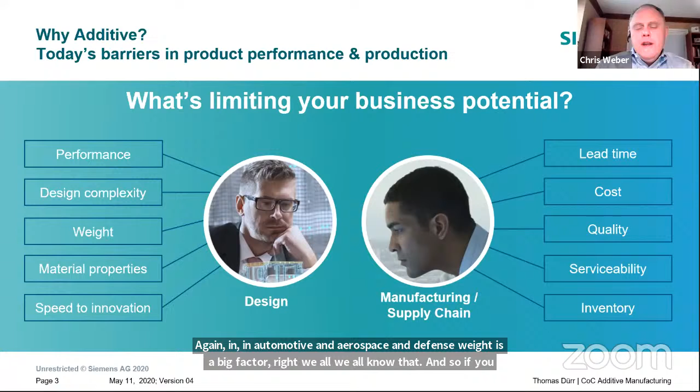Material properties is another one, right? Speed to innovation—we all pretty much are familiar with prototyping. Prototyping's been around for a long time. So to be able to iterate on a design faster is important. We have some consumer goods customers that do a lot of prototyping for clinics, right?

So think about if you're doing, I don't know, toasters or blenders or vacuum cleaners or whatever, right? If you can bring people in and have them try out the product—how does this button feel? How's the handle feel? Is it ergonomically correct? Should the handle be a little thicker? Should it have better grips?

Right? They can give the feedback, and then literally within 24 hours, depending on whatever you're printing and the material you're using—24, 48 hours—you could have a replacement part for that and bring those people back into a clinic and say, okay, we took your feedback into consideration, what do you think now? So just in prototyping itself, that allows you to do those iterations much faster, because let's say it was plastics, to make that change you'd have to create another mold. That takes time and that takes money. So speed of innovation is really important.

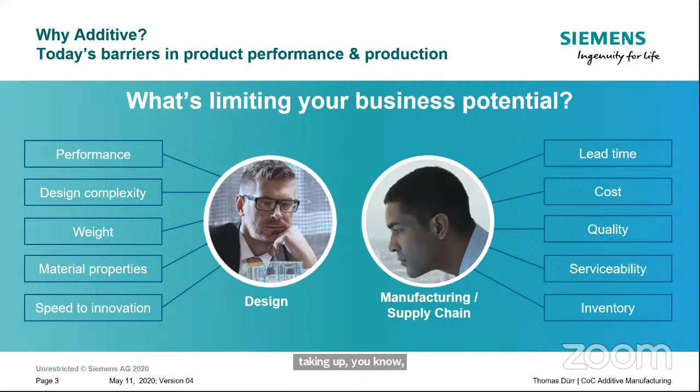It's the same thing when it comes to inventory spare parts in the shop floor. If you think about how many spare parts are in the spare parts stores in a manufacturing facility, and you multiply that by the holding cost, it can get into multiple millions. So what if you thought about your spare parts and asked which ones could I print on site? I'd have to really investigate how often do I replace that part, how much does the part wear, what's the mean time to failure? I might be able to say it'd be really good to have a printer on site for some plastic parts that I don't have to house because they've been sitting there collecting dust, or making it out of some type of composite. So inventory is another big area, and there's going to be growth in trying to reduce the amount of spare parts that you store in your manufacturing facilities. We all know that space costs money, so if we reduce the amount of space, that's money back in our pocket.

So the whole idea of additive hits a number of areas. One is reimagining parts, or your products - combining parts, maybe an assembly that was made up of 12 parts, and you redesign it into one part and make it more efficient. It really allows you to think out of the box, whether it's a part, tooling, fixtures, or molds - redesigning a mold, for instance, to be more efficient so it cools faster and I can get more parts out of the mold per hour. You can't limit yourself. Additive allows you to look at each piece of business, whether it's a small scale problem where I need a hammer for this nail, or an enterprise problem, like spare parts. How can additive help me alleviate or reduce the amount of costs that I have for spare parts? That falls into rethinking your business.

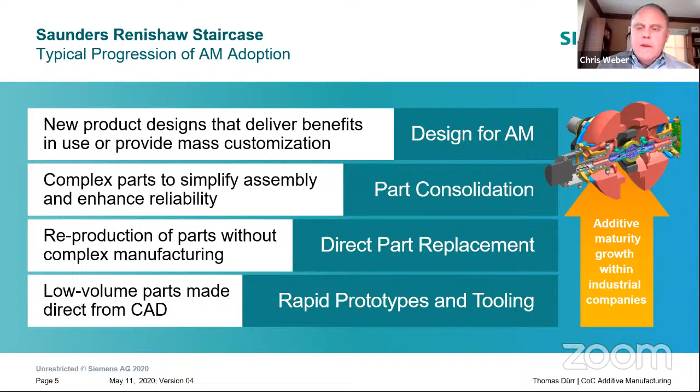That's important. Mobility, the high-speed trains - we're using that. I've got some examples here as success stories, but we're using it in the mobility services. Healthineers, our healthcare side of the house - things like cutting guides for surgeries. The software side of the house, where I'm from, is creating the software that enables the design and the validation and the printing and the feedback mechanism or loop in managing that whole process.

Motion controls, right? So we're working with the printer OEMs to outfit these printers with proper controls, because at the end of the day, if you're going to be serious about production, those printers have to be industrialized and they have to play nice on the factory floor. You can't afford as a company to have some architecture that's way out of whack from everything else.

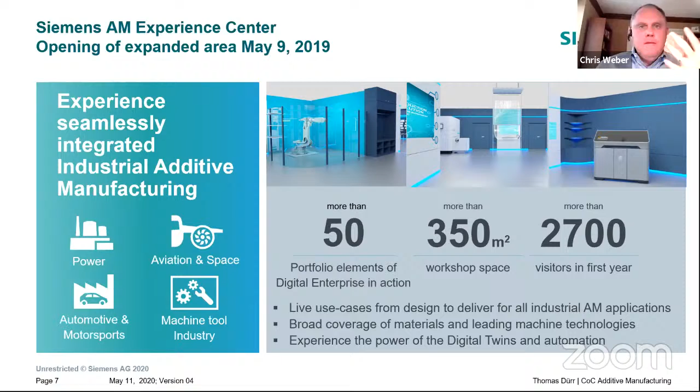And then we have a satellite center that we're opening up, hopefully, with all the COVID stuff, I'd say June, July-ish of next year, in our Charlotte, North Carolina facility. Similar type of thing, where we'll be able to bring customers in to get some hands-on, maybe some design clinics. If you're not certain about a specific printer modality or material, you can go in and get some hands-on. We're really excited about that.

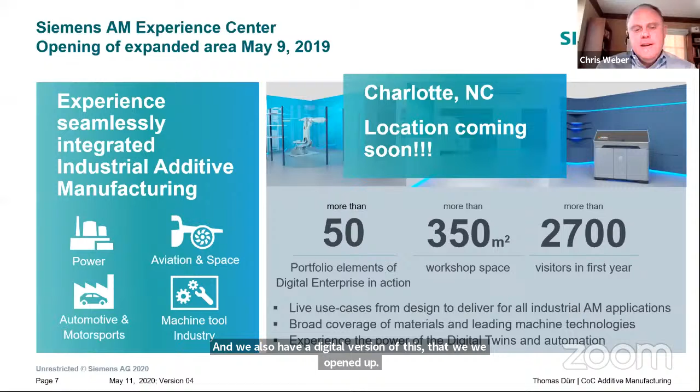We also have a digital version of this that we opened up in February, a lot of that was due to COVID. So we can go through a whole walkthrough in a virtual environment of the Erlangen facility, which is really cool. We've gotten a lot of feedback from customers that they really enjoy and appreciate that also.

And then I mentioned our service bureau business. We have roughly 40 EOS printers predominantly, I think maybe a couple of Renishaw in Worcester, and here in Orlando we started out with a couple EOS printers, and there may be a Renishaw on the way also. So we can print parts not only for ourselves, which is predominantly what we do, but we do spend, I think, 20% for outside of our business as well.

One of the things that's very unique, from the software side, we're well known for managing the entire process from ideation through the validation of the design, as well as the manufacturing planning and validation for that, and virtual commissioning, and then all the way out to the shop floor. One of the things we're focused on is that additive is special, but it isn't that special that you want to treat it like an island.

It has to play nice with the rest of traditional manufacturing. So it's not a panacea where you're going to junk everything you have on a traditional basis. Everything has its place, right? Because it'd be completely insane to say, well, I'm going to print hoods. No, that doesn't make any sense, right? So it has a place, and our big thing is that we have incorporated the additive.

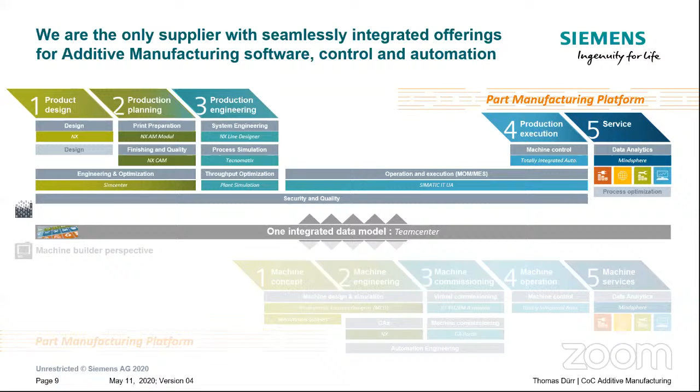Hey Chris, I think your Bluetooth went down. Hopefully everybody-- Chris, we can't hear you. Can you hear me now? Yeah, it's good. Okay, sorry, my Bluetooth went out.

So we've incorporated the whole approach for additive so that it has to be a part of traditional, or play with traditional manufacturing. That's important, so we want to treat it, handle it, enforce it in a way to play nice. You can't afford to have a new technology like this, especially if you're trying to productionize it, sitting off in its own little island.

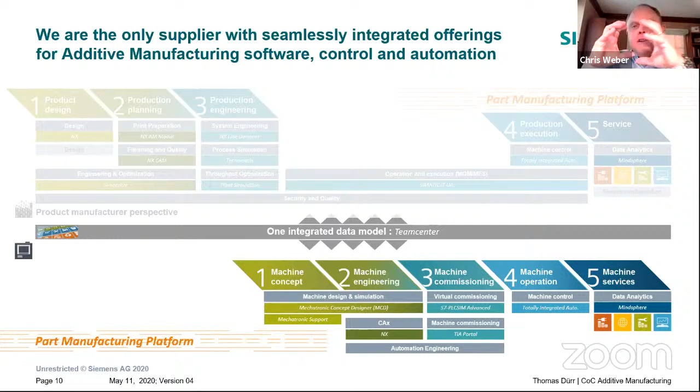The other thing that's different too is with our motion controls and factory automation side of the house, we're working in partnership with a lot of the printer OEMs. So we're outfitting some of those with our controls, which I'll cover in a little bit. There's some inherent value in utilizing, for those of you that may have Siemens controls, some Easter eggs available in utilizing our NX software, so that you can actually do a simulation and validation of the process and then capture that data. So we're not only looking at the process, but extending that back up into the printer OEMs.

When we look at the process, for those who haven't been in this space, it's a pretty chopped up process. We didn't put a lot of emphasis early on from a software focus. Full disclosure, back in the early days of prototyping.

What's being used out there is, sometimes people are using 3, 4, 5 different software packages. And if you're trying to get into the production side of the house, that becomes very limiting, and it opens you up to error. That's the last thing you want, because we always want to do first time right, especially if we're talking production.

So for us, taking the same approach that we do with traditional manufacturing, we bring that to the additive space. What we want is a continuous workflow, so if you chose to, you could have one person sitting at their computer going through the entire design, validation, print prep, and print process. One key factor is being able to manage that.

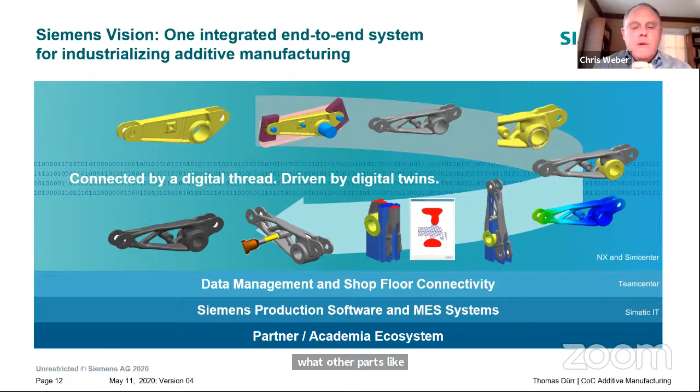So that's what we have here. This is basically a particular workflow for powder bed metals, and this is assuming that you're going to create a new part.

Depending on what printer modality you're going to be using, whether it's powder bed fusion for plastics or metals, or multi-axis DED, directed energy deposition, there's things you will do and won't do. This is kind of like a framework. Some instances you want to lightweight, some instances you might not. But that's pretty much the cadence: you're going to have to come up with a way to go through the design aspects of lightweighting.

The key thing is once you actually do a structural validation of the part, you don't want to have to go back from a mesh into a solid and back and forth doing translations. With the way we've architected the solution, you can continue through the whole process. So if there's an area where the walls need to be thickened up, you're not having to translate back into a solid. You can go all the way through, including post-processing if you need to, utilizing the mesh. That's our whole convergent modeling perspective, so you can do those iterations right then and there without going back and forth doing translations.

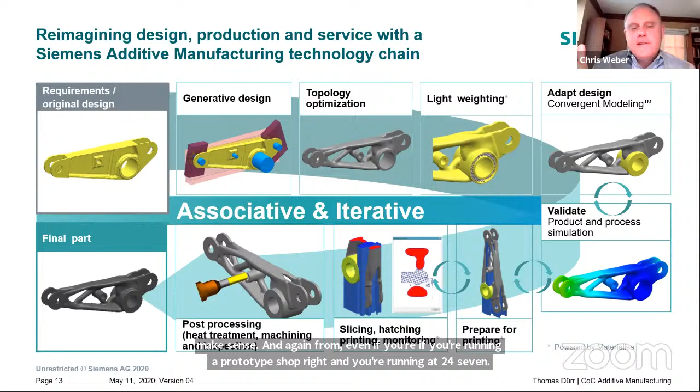Another view of the way we look at it, whether it's traditional or additive manufacturing, is that the digital twin is really important—being able to do everything in a virtual environment and have it representative of the physical. For additive, that's exactly where we're focused and continue to head: we always have a one-to-one relationship between the two, so you're shortening the overall design cycle, getting your products to market faster, and validating to make sure that when you print, it's right the first time.

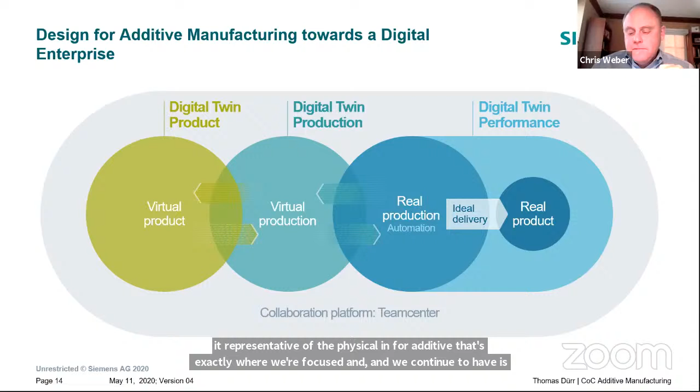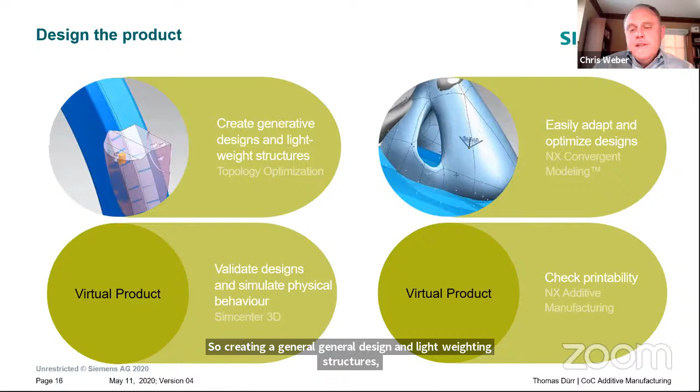So just a few vignettes here. We're talking about virtual product: creating a generative design and lightweighting structures, as well as adapting and optimizing the design as I mentioned. We're in the mesh here, and we're able to make changes to the part where we see fit, and then do the actual physical validation of the part using CAE analysis.

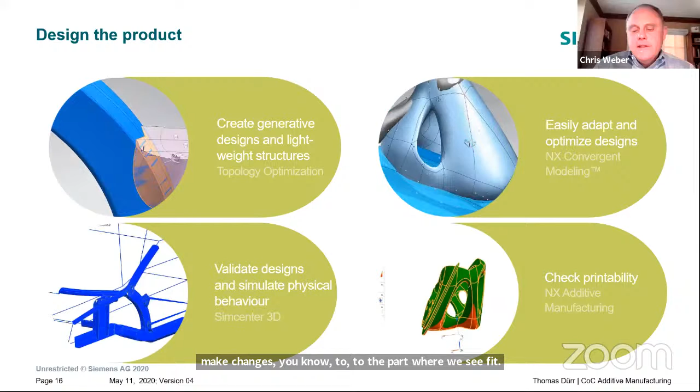Then taking that information and making those changes on the fly, and doing a print check—I want to be able to run a simulation on the print and validate to make sure I don't have any areas where I'm going to have a fissure, a crack, or deformation.

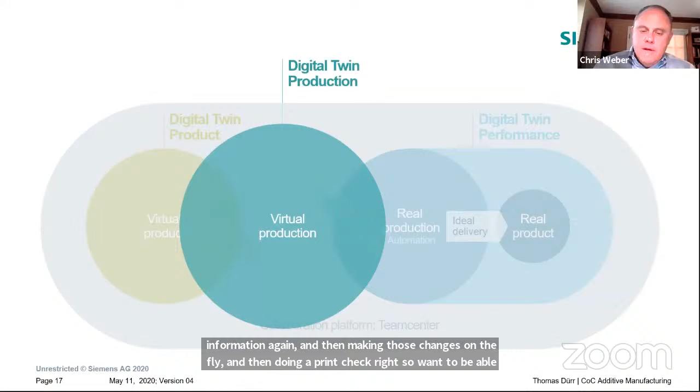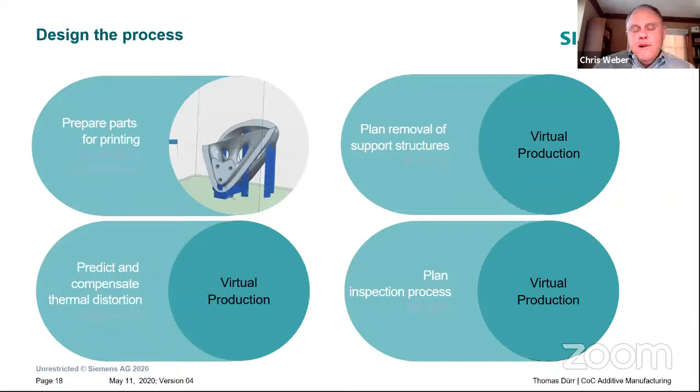As far as preparing, being able to have the build prep for the slicing and hatching, making sure you're able to identify the proper support structures. We can do that automatically or manually—a number of different ways to set up the support structures and position them properly. We even have, for the metals, the powdered metal side, a tool we call the easy button, which can take somebody who's a newbie and let them act as if they're experienced—it'll do the work for you, optimizing your orientation and support structures.

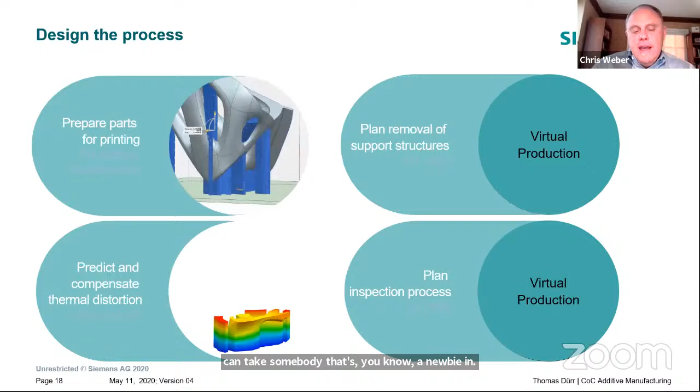Predicting and compensating for thermal distortion, again running the simulation once you've positioned it, to validate that I'm not going to have any problems. And then I may need to go back again and thicken up some areas or create support structures that will alleviate any areas of distortion.

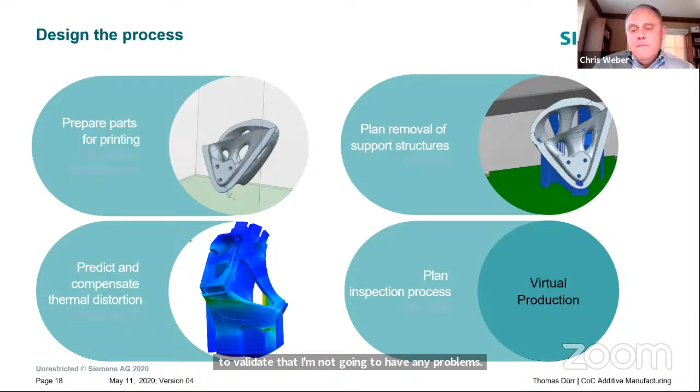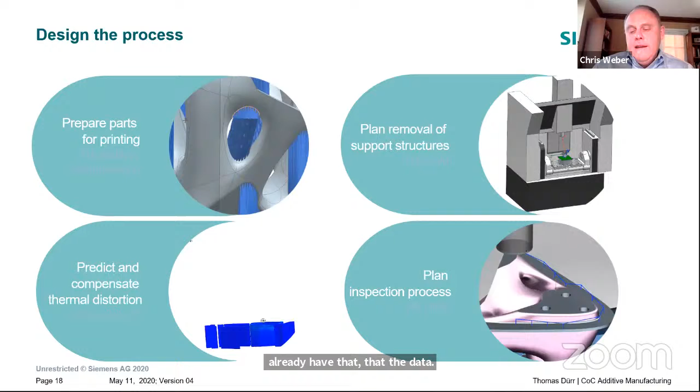Once I get to the point where I have to do any type of post-processing, specifically machining, I already have that data and can machine right off of it. I'm not having to jump into another package and run a separate simulation—I'm doing this all off of the same CAD model. And then also the virtual inspection, whether it's an in-process inspection or a standalone CMM inspection—again, you have all the data available, and it's all within the same product within NX.

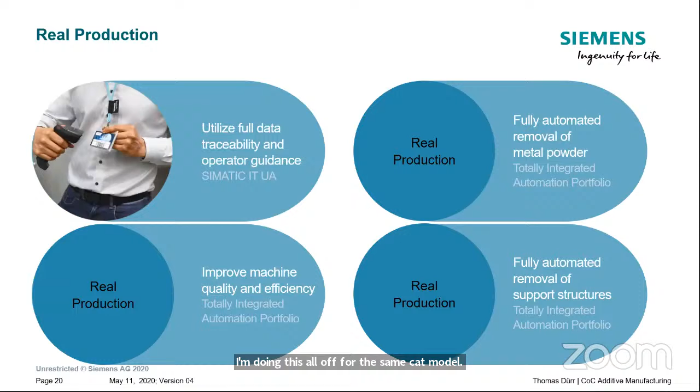And then the automation piece of this, the traceability. So in situ monitoring is really important, especially when it comes to validating your assumptions on your simulation models. What we assumed or theorized on what would happen to that model is in fact exactly what happened when we printed it.

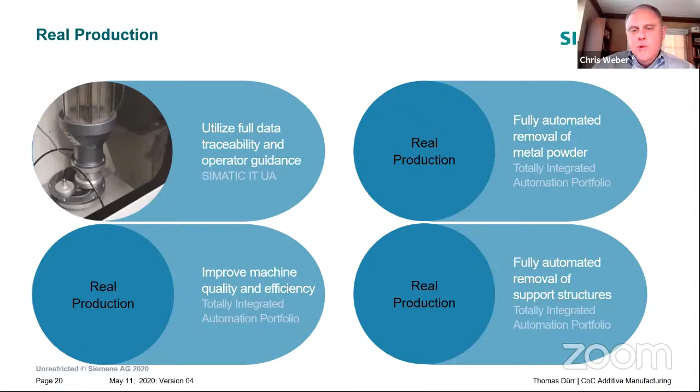So the closed loop piece of this, utilizing MES to be able to capture that data on the manufacturing process and feed it back into the overall development cycle of that part, is key.

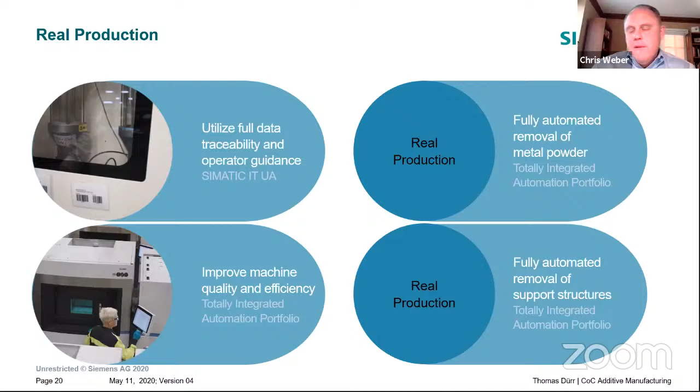And then also improving machine quality. We have our totally integrated automation portfolio, which is all focused on the shop floor and connectivity with those printers.

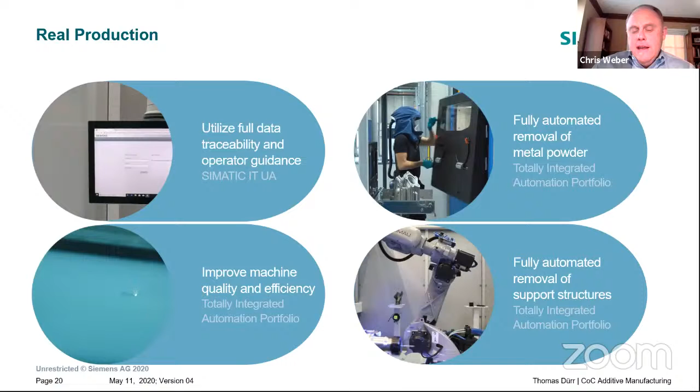And then the production piece of this, the powder removal, an automated way of removing the powder, and then support structures, again material handling, whether you're doing that in a hybrid environment and removing some of the excess material, or whether you do that via, let's say in this picture here, a robot and machine it off.

The other thing to take into consideration is if you're printing and designing in multiple locations, it can get pretty complex. So what we're trying to do is take away some of that complexity. What we've done is created what we call our additive manufacturing network.

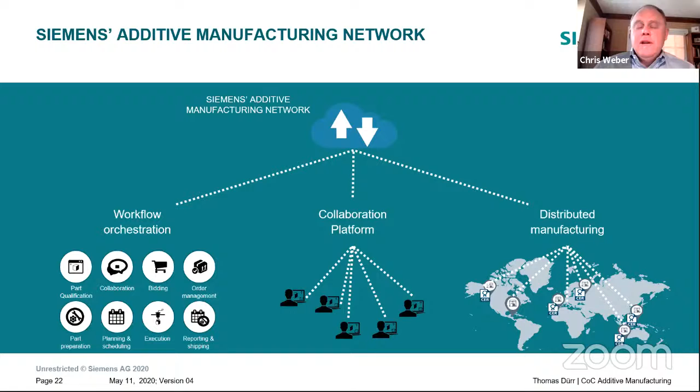That's a single source in order to do collaboration between an end user and supplier community, whether it's internal—your own internal service bureaus—or an external service bureau, or other associates across different locations. We want to be able to have an exchange, if you will, to facilitate that collaboration as well as the bid process.

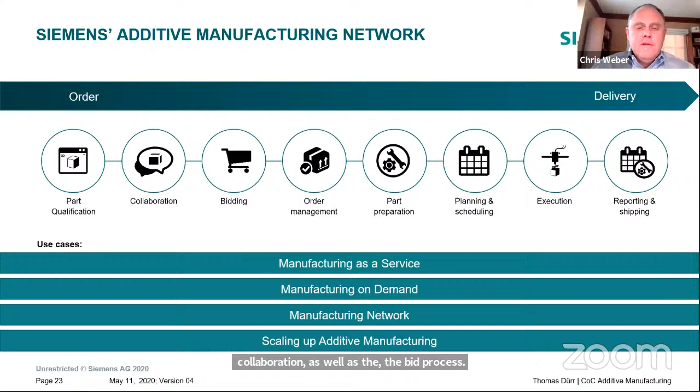So part qualification, collaboration, bidding, order management, part preparation, the planning and scheduling piece of this—which is really critical from a service bureau perspective—the execution, and then the reporting and the shipping. So those are all the things we're taking into consideration with our additive manufacturing network.

So what's trending? As I mentioned, there's a whole bunch of different technologies out there. Two years ago, powder bed metal was the real big ticket, everybody was focused in on that. There are some difficulties with powder bed metals, and some people have decided to move away from that and look at other technologies.

Binder jetting, or multi-axis, right? So multi-axis seems to be what I'm seeing—this is me speaking—in the last year, this is really starting to take off.

Laser metal deposition, whether it's through powder or wire, arc welding, electron beam. Cold spray's been around a long time, especially in aerospace and defense since the 60s, but that seems to be making a big comeback, or at least a lot more push on it, especially for coatings. So there's a lot happening in the cold spray side of the house, as well as material extrusion.

Whether that's gantry-based or robotic-based, that's another big area of growth. So multi-axis deposition—a lot of the OEMs are either, as I mentioned on the previous slide, doing DED, which is directed energy deposition, electron beam, fused deposition, carbon fiber. That's another big one.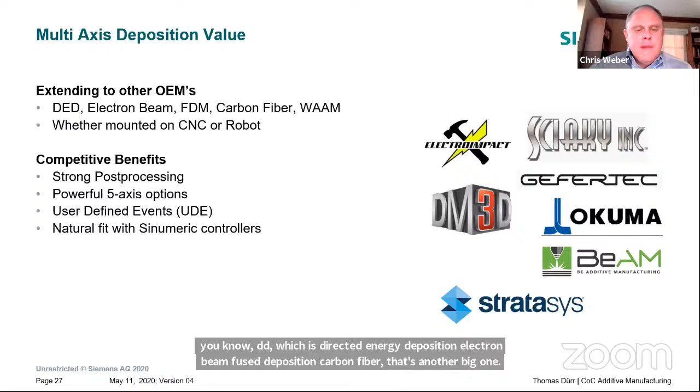The wire arc additive manufacturing—so think about a gantry in a warehouse where you could print a fuselage of an airplane, right? That's wire arc. And then whether the print head is mounted on a gantry, via CNC or robot.

And so the benefits to that: strong post-processing capabilities, 5-axis capabilities is really important, and the user-defined events, as well as it's a natural fit for us—being selfish again—for our Sinumeric controls devices.

So the CNC machines—there's hybrid, such as the DMG Mori, for instance, where you're doing additive and subtractive in the same space.

And then, or if you're looking at just additive by itself, some of the competitive benefits are high accuracy and rigidity, mixed manufacturing needs based on part requirements at any time, reduced fixturing, and machine kinematics are well defined. So this is one of the areas we're spending a lot of time and energy in.

We do have a huge expertise in this area to begin with, and then just adding additive to it is just like adding another option for us.

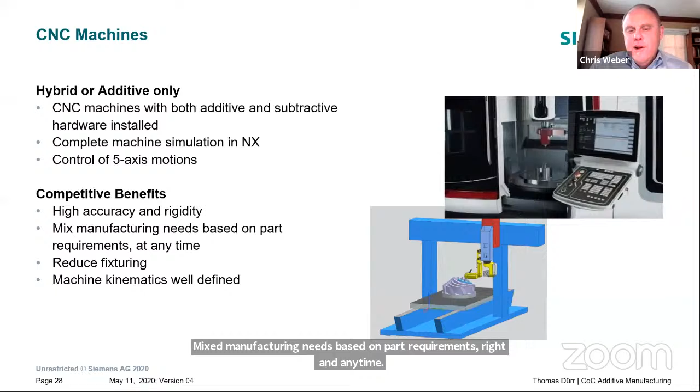As well as robotics, that's another area. There are some OEMs out there that provide out-of-the-box functionality for multi-axis robot based systems, as well as we have customers coming to us saying they know robots, they know welding, and want to make their own work cell. So we're helping some of those customers with designing those work cells. This is a real interesting area, and I think there's going to be a lot of growth here, so it's one to really keep your eyes on.

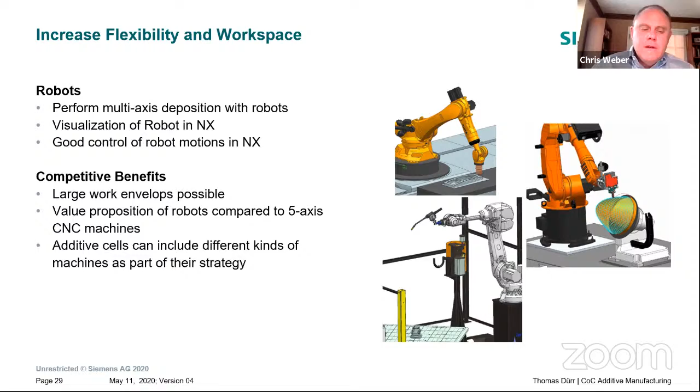I've mentioned the workflow earlier. As you can tell, that's basically the fixed plane or flatbed additive, as some people call it. That process is going to be different from multi-axis. For multi-axis, you're going to decompose the part, load the machine kinematics, and locate the part, whereas before you'd be doing nesting, you're not going to do nesting in this scenario. For the fixed plane, you're creating support structures; here, you're creating tool paths. Whereas before you'd be slicing the data and doing post-processing, here you simulate and post-process the actual tool path. The 3D print program is different too, because here you actually run G-code to facilitate the print process. So there are some similarities with the process, but definitely some differences in how you execute each component.

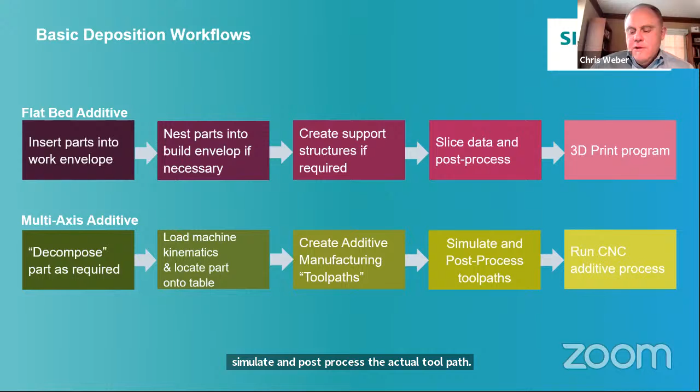So let's talk about some success stories.

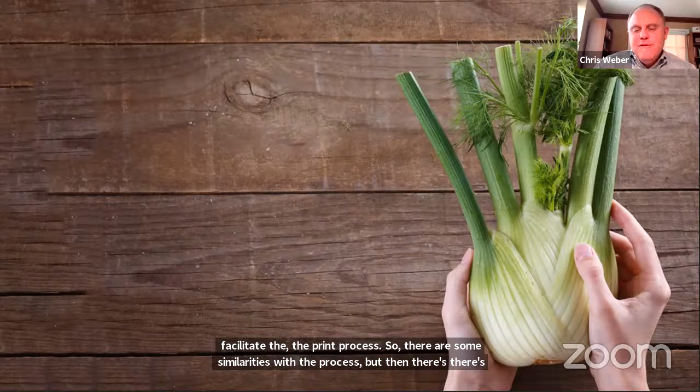The fennel bulb is one of our first ventures, and there's a kind of cool story to this. One of our engineers in corporate technologies was the first person assigned to redesign a burner assembly that we use for our customers in a refinery. This gentleman couldn't really think outside the box, so he went to the grocery store and happened to come across this fennel bulb, and the light bulb went on. That fennel bulb became the inspiration for the redesign of this burner assembly.

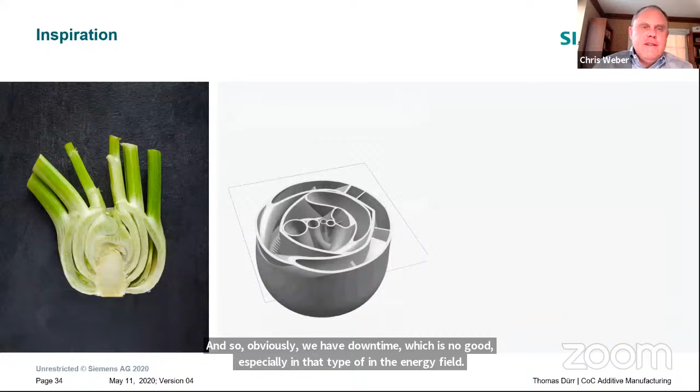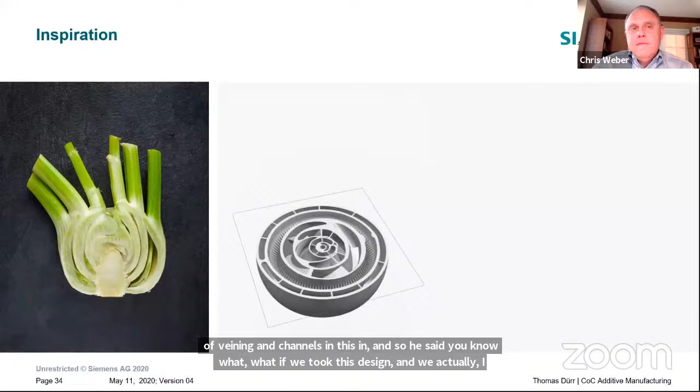So here's where the fennel bulb comes in. He noticed there was all sorts of veining and channels in it, and thought, what if we took this design and brought it to the burner? Now, obviously, from a traditional or conventional manufacturing standpoint, there's no way, as you can see in this animation, that you'd be able to do this traditionally. Just not possible. So that was the inspiration.

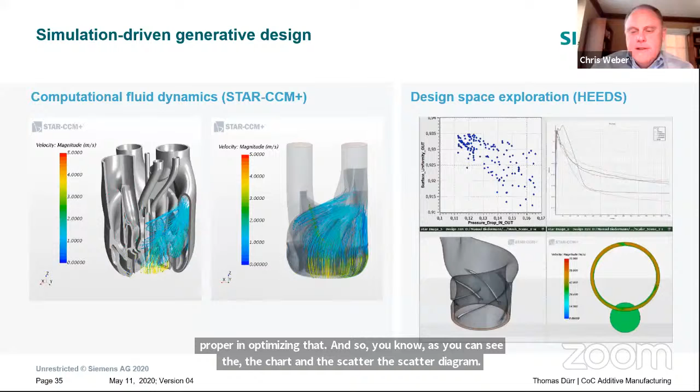What he utilized is our CAE software, a tool called HEEDS, where you set the parameters for the particular part and it will actually create the design for you. It'll optimize the design, going through and checking that, in this case, the heat exchange is proper, optimizing that. As you can see in the chart and scatter diagram, it's automatically designing and running through different iterations of the part, and you can tell it how many iterations you want. You don't want to let it run for 3 weeks, but you could if you really wanted to optimize something. But that's what was used to optimize this part.

So now we were able to bring this part down from 3.5 meters to 1.5 meters. We've reduced the entire size of this thing, and it's now one part. What's the other cool thing about this, I'll go right here to the video.

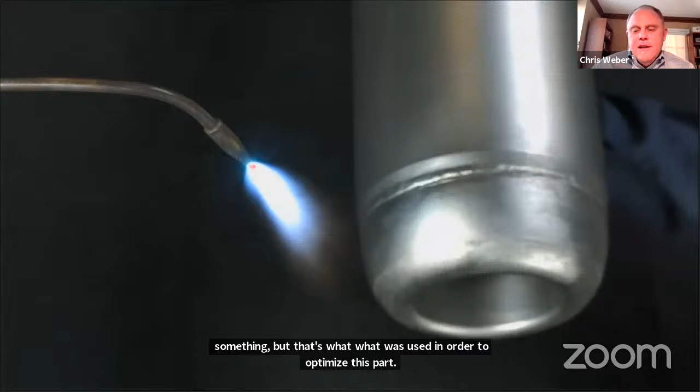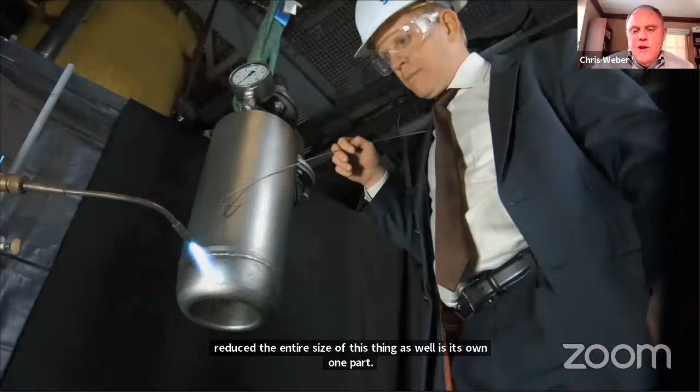This actually disperses the heat better than anything they would have been able to design before. This is the gentleman who was the engineer that redesigned the burner. As you can see, he's heating up the ring to prove a point, and you can see it getting glowing red. He's going to pull this away and put his hand on it just to prove how efficient this new design is at removing heat.

So what's that done for us, for the customer in that area? This is no longer a maintenance issue. That tip does not melt off anymore because it's dispersing the heat properly. So that was a big bonus for us, and it also helped us win an additional contract.

So these are the type of things you need to look at. When I mentioned before about cost and economics, you've got to look at the whole big picture. This was a little more expensive to make initially, but in the long term it's paying dividends like nobody's business.

Another thing we did internally is with our turbines. The maintenance contracts are where companies like Siemens and GE make their money. When it comes to energy, the less your turbine is down, the more money you make. So this particular part, this burner, we call the Buma burner.

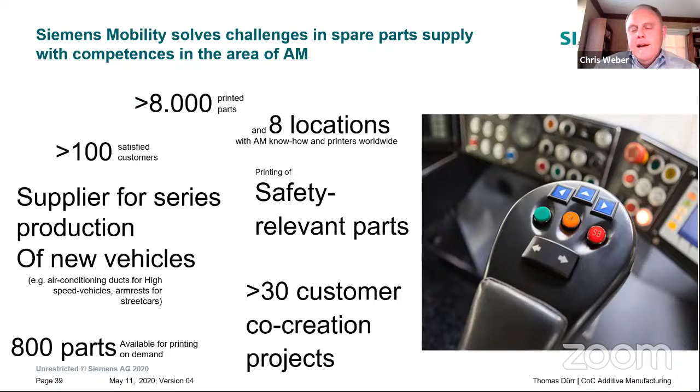So to get the money back out of, or the payback from, a mold, this is actually a lot more cost effective. Plus it's easy to make spare parts when we need them—we don't need to keep spare parts sitting on hand. So now if something breaks that we've printed, we just print another one.

Let me shift gears a little bit away from Siemens and talk about some of our customers. Toolcraft was one of the first folks to jump on board. Toolcraft builds a lot of molds for their customers—they do automotive, aerospace and defense, and some medical device work also. I'll run this; I've got a little video here, and hopefully we get the sound.

One of the managing directors of our business is production of components and assemblies by different production technologies. Just one year ago, we took the decision to start with the implementation of Siemens. The first step was the AM integration, and now we are about to integrate the Simcenter portfolio. We are using FEM calculation, topology optimization, and also the AM process simulation.

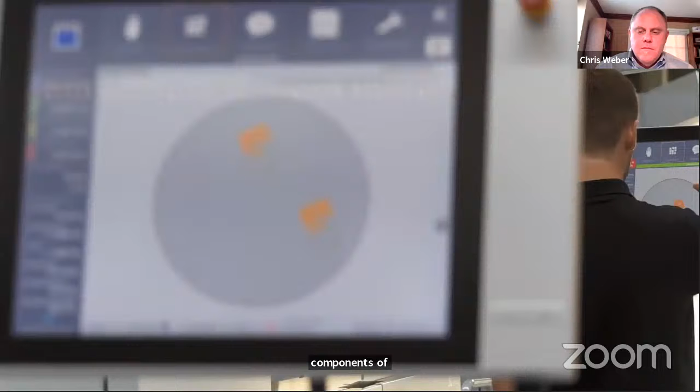At the moment, we're planning the implementation of the MES MOM solution by Siemens. The goal should be to be paperless along the process chain, and we want to collect useful data so that by the end of the process we are able to submit a certificate to the customer with the part.

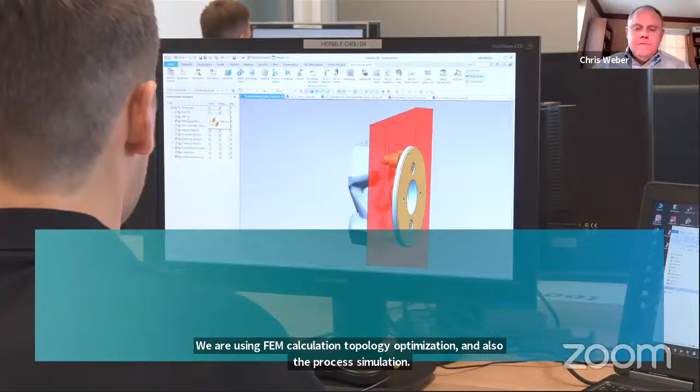My name is Ralf Dumida. I'm the design engineer for additive manufacturing at Toolcraft. At Toolcraft, we have AM design challenges almost every day. Our customers send us the part, and our aim is to find the best solution for the customer.

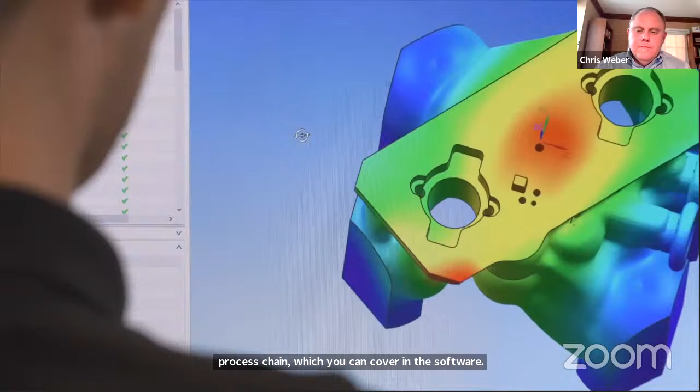The benefits of Siemens NX are the consistent process chain which you can cover in the software. So we can start modeling, go direct to the simulation tools, for example process simulation, topology optimization, and verify the result of your topology optimization by FEM analysis. Siemens NX covers all these different applications in one software environment. That's a huge benefit for the complete development process because you can save time and react to changes very quickly.

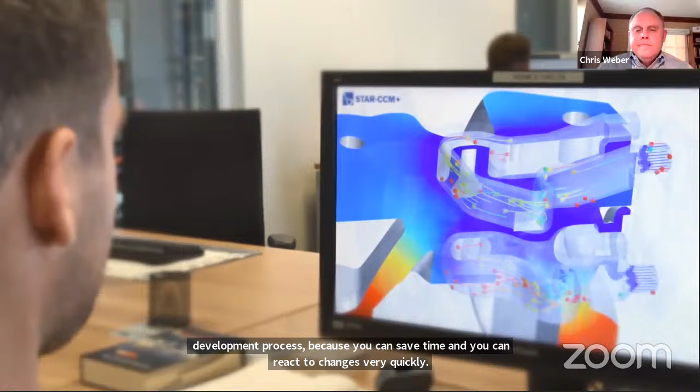My name is Thomas Lender. I'm responsible for project management in injection molding and tool making. A big benefit for this manufacturing is the manufacture time from design to the first parts of tool. The next benefit is simulation about cooling and mechanical strength, including the cycle time.

We reduced the cycle time by 30% for this tool. The tool needs less energy for heating and cooling. It is easier to handle because it is lighter.

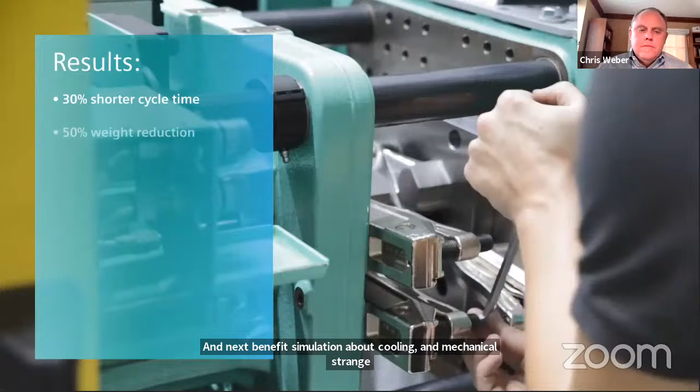We always try to combine the benefits of AM technology with the functionality of the customer part. Therefore, it's absolutely necessary to work with a comprehensive software tool like Siemens NX.

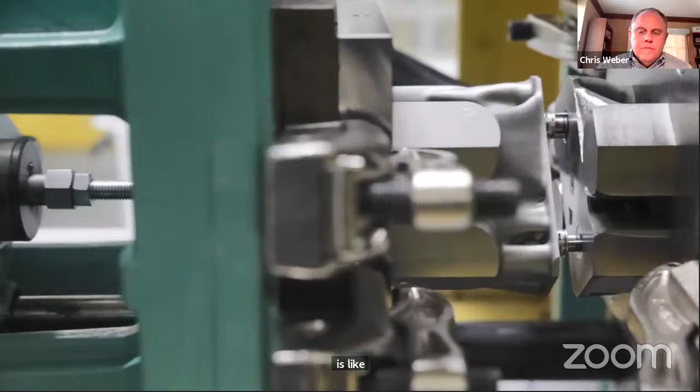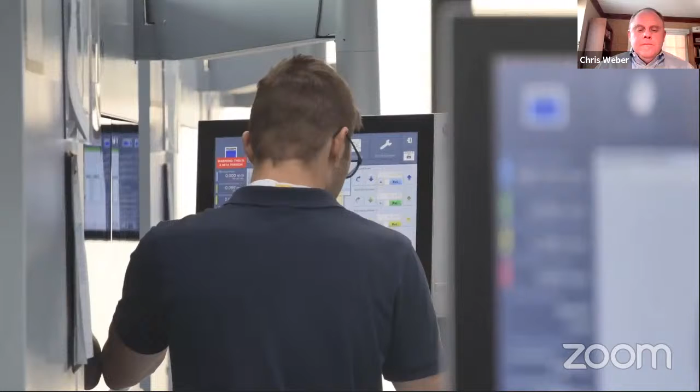2018 was definitely a very exciting year. We had huge expectations for Siemens. So far, I can really say they are completely fulfilled, but we have some topics to do, and we believe that we will have the same quality of collaboration that we had so far.

So that was pretty innovative for them to focus in on the mold designs. We're going to jump into a different area again, which we call the super duct example. The video for this is pretty self-explanatory, but we actually were trying to come up with some projects that HP and Siemens could work on together, and something fell out of that had nothing to do with the original intent. So I'll let this video play.

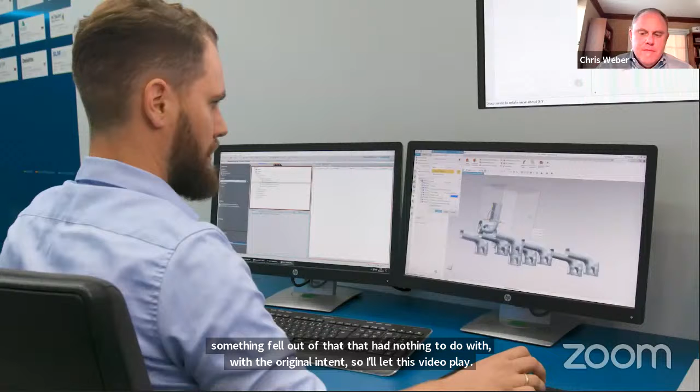Additive manufacturing works always from the application backwards, user-centric. If we're not helping customers visualize the potential of this new technology, it won't happen naturally. We came together with the new development from HP for the much more productive 5200 series system and the Siemens software solution. A deadline is the mother of innovation.

This started a few months before we launched the 5200, and that gave us a couple of months to come up with something. So we got our teams together for a workshop in Vancouver, Washington, and we spent three days together, locked in a room.

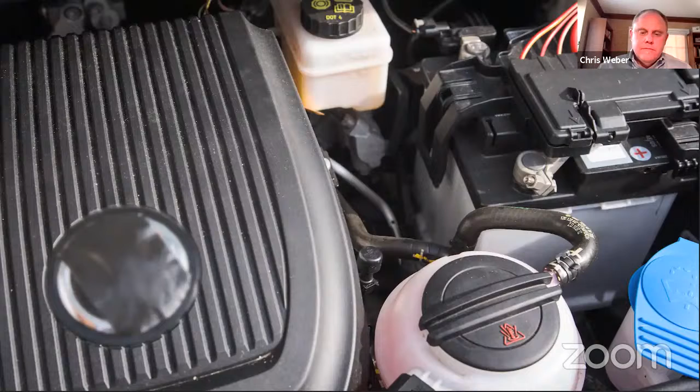We talked about structures in an automobile that you could optimize for crash protection. We talked about cooling and batteries. All that while we were brainstorming, there was this unassuming cooling duct sitting in the middle of the table. Finally, one of our guys picked it up and said, 'What is this?'

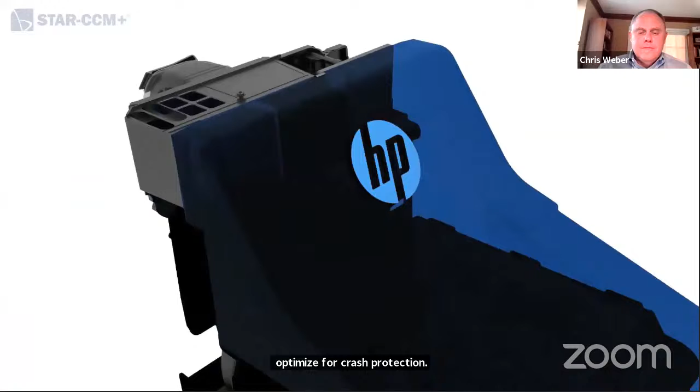Of all the possibilities, we landed on a duct, which is part of our own HP 2D printing devices. To maintain the reliability for that print head, we need to keep the ink cool, and that's done through the cooling system. The duct was an integral part of connecting the fans to the cooling of the pen.

We already had a 3D printed version which combines 6 parts into one, but we wanted more. We wanted more performance from the general flow, and we wanted more balance between the 2 print heads. Topology optimization will look at which parts of that design space help to gain our engineering objective, which is minimizing pressure loss, and basically then remove those parts which are detractors.

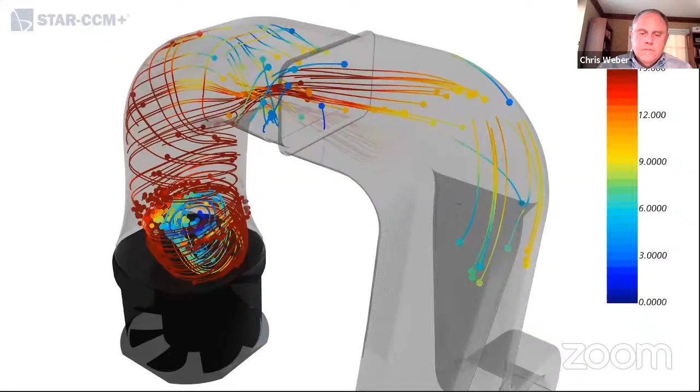We had a super large amount of recirculation, so basically the air is going in circles, losing a lot of energy. Now we have basically 4 distinct flow guiding vanes, which take out the swirl and immediately force the flow to go straight forward instead of going in circles.

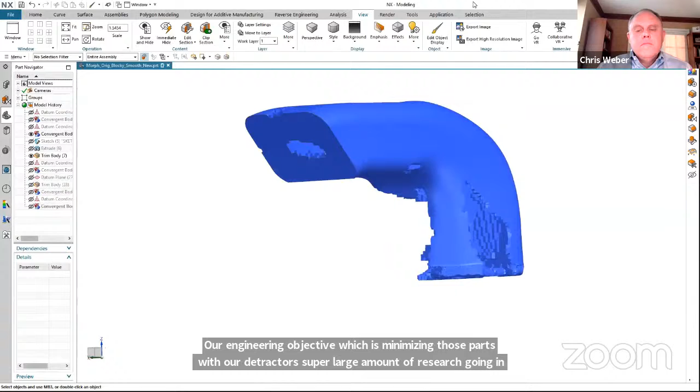It was really hard to wrap your head around that geometry when we first got it from Julian, just because it was so different than what everybody was expecting. So I had to take that geometry, smooth it out, create a thin walled part from that we could use to create the duct part.

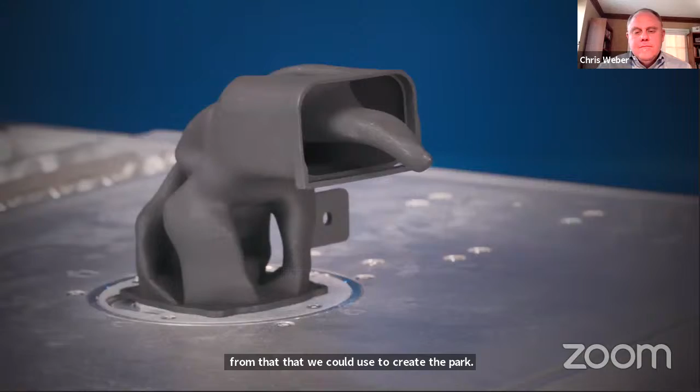When you talk about how the original duct was designed, where a person had to manually make every radii, every extrude, every little feature on that part, with a simulation driven part you don't have that. The simulation makes the geometry for you, and that is a much faster process than trying to design all that by hand.

As the design was shaping up, it defied whatever everyone, including me, was expecting it should look like, with the tongue sticking out. I was pretty stunned when I learned that the software predicted a 22% improvement in airflow. 22%? That seems pretty high compared to our baseline.

But again, Siemens, they are the simulation experts. We had to go back to the physical world and actually test that new design is going to deliver more airflow.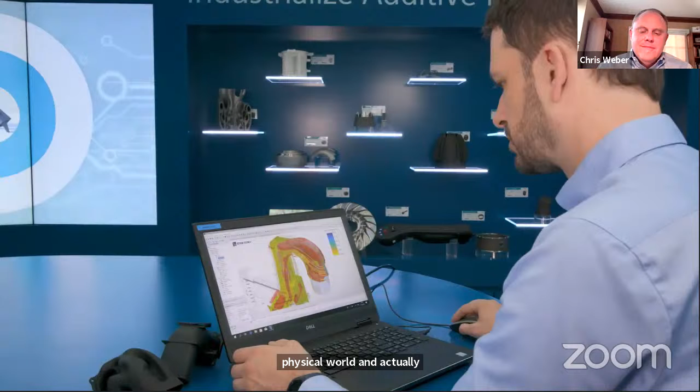Sure enough, when we went back and measured, the Siemens design duct improved the airflow by 22%, just as the software predicted. On the other side, normally you need months to develop these, and here we have reduced the innovation cycle time by 75%, which is quite remarkable if you think about it, because it's not like you landed on a design. We landed on the most optimum design for that particular problem.

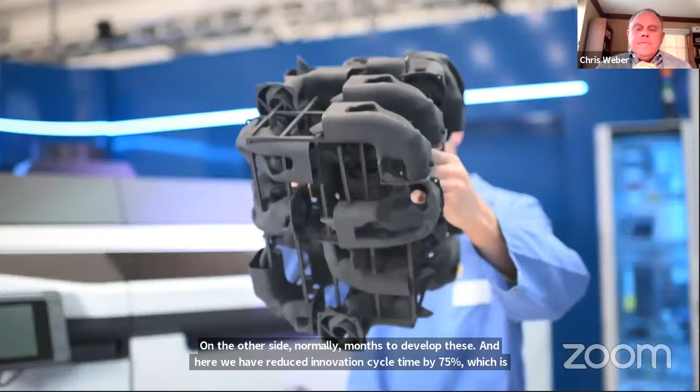Getting the optimized design was just half of the battle. The next part of the challenge was transitioning that design into the AM factory where we could produce it at scale. A lot of companies only have experience with lab-like environments. So they have 2 or 3 printers, they know how to operate it, but they actually don't know how it will look like if they ramp it up with more printers.

We're able to show the full simulation up to 100, 200, 300,000 parts by utilizing a digital twin, and then start with different scenarios to optimize how to improve it. For the end state, with 300,000 parts, we would need 36 printers and 6 workers.

We can take an application with improved performance from the flow optimization, show that we can produce it in the industrial printing system, and this is unique in the world.

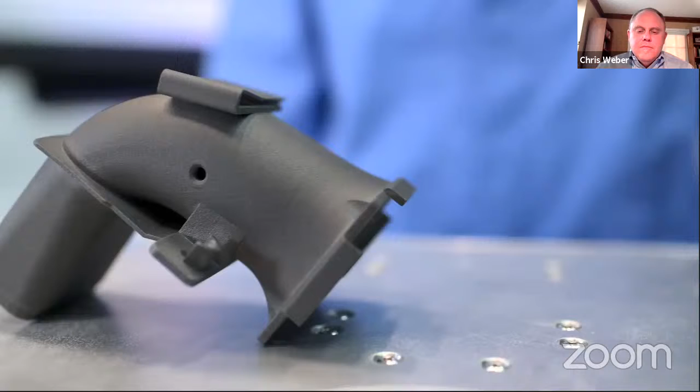It kind of tips engineering on its head a little bit. Engineers no more should really be focused on the form and what the product looks like. They should be focused on what the product needs to achieve.

We've got a part now that has done something that I don't think anybody else in the industry has done. And when you combine that with HP's ability to industrialize additive manufacturing with their printers, it's a really strong solution.

Interest in this type of solution has been outstanding, and not only in the automotive industry, but also consumer goods. Think about refrigerators, air conditionings, vacuum cleaners.

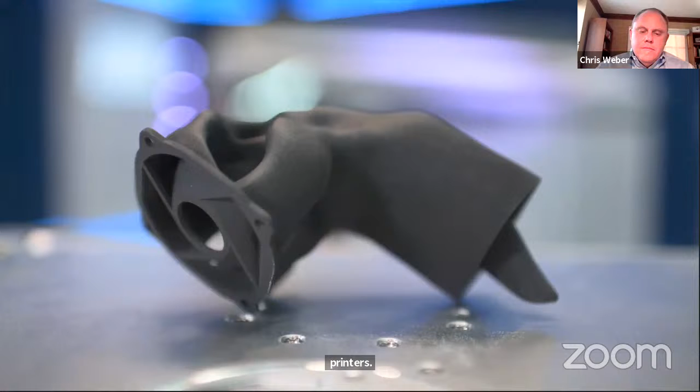What I'm most fond of from this project is going into meetings and handing the duct to a CXO and having them hold it and be inspired by what was possible with additive manufacturing and generative engineering, and wanting to be able to find a way for their company to be able to repeat this kind of success.

So it was really cool here. You see on the left-hand side, this was the original designed duct that HP designed. And then of course they optimized it, right? So this is their optimized duct, it's one piece. And so they thought they were done, right?

And as the video states, we were able to, utilizing our tools, create something that was even more efficient as far as performance goes with the redesign. So this obviously helped from the side of consolidating parts, which was good, but then taking it that one step further and reimagining that duct.

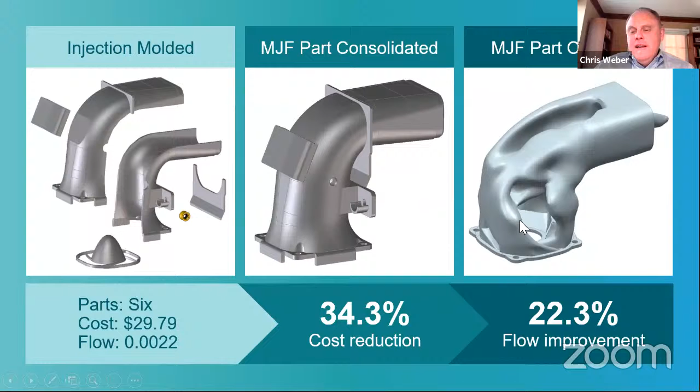The other thing that we've done in association with the National Center for Manufacturing Sciences, NCMS, is we proposed a cloud-based managed design for additive environment. Specifically, focusing on what the DoD, the Department of Defense, would like to do, is to be able to design anywhere and print anywhere.

So last year we went to work, rolled up our sleeves, and we have put together the first ever solution that's cloud-based and managed by our Teamcenter, so that truly enables anyone to design anywhere and print anywhere.

So this is something we're going to continue to work on with NCMS in partnership. And we've renamed this the Digital Proving Ground, because it's a place where any of the AMP members, which NCMS is part of, we're part of, can come and actually utilize this environment and get familiar with the process and the tools and, quite frankly, designing for additive.

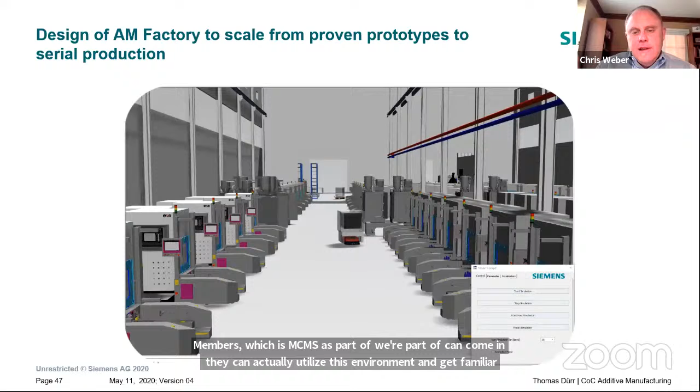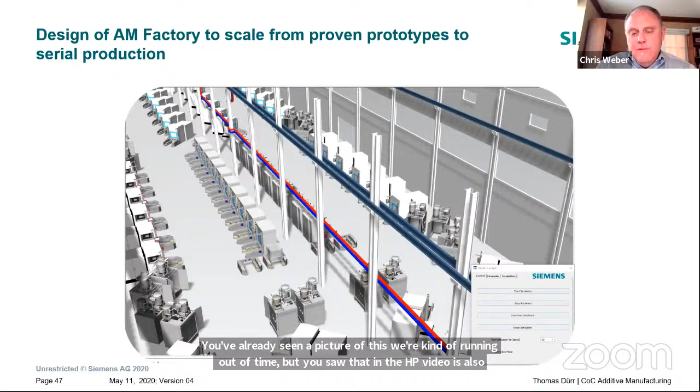You've already seen a picture of this. We're kind of running out of time, but you saw in the HP video, it's also thinking bigger and out of the box. When we look at additive, we don't look at it as an island, we look at the big picture. So what we did here for EOS is we helped them design, using our tools, a production facility. You have your material handling devices, just like what we did for HP, you saw in the video. We did the same thing here for EOS.

I just want to wrap this up by saying that we have a methodology that we follow. We have a consulting organization specifically for helping enterprises with additive. Our approach is you really need to understand and ideate if you're going to go for additive, learn, create your vision, and then you need to define and pilot. You have to identify what you're going to do, how you're going to do it, and what your investment is going to be, and start a pilot.

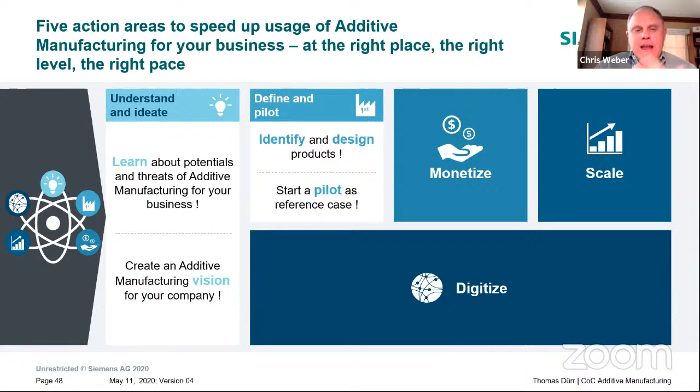Start somewhere, but start simple, start small. Don't run out there and buy powdered metals if you've never done anything before, if you've never prototyped, you're not even familiar. Start small, start simple, so you get familiar with it. Grow your people, invest in your people, so that you start to build a culture that is really looking at thinking out of the box.

And then, of course, it's got to be economical. I will tell you, your first iterations and your first venture, this is an investment. Don't go into this and say, well, I have to have a return on investment in 6 months. No, this is not the type of technology. There's companies that I work with, a lot of companies realize that we're not going to be ROI focused.

We're going to focus in on pretty much the art of the possible. What things could we do? How could this help us in the future? It's an investment. You start to make some money down the road, you figure this out, and you're doing some production parts, whatever, fantastic. But this is the time, this is the moment in time to start to embrace, engage, and learn. And I want to tell you too, celebrate not only your successes, but celebrate your failures. Because at this point in time, failures are going to be as important, and sometimes even more important, than the successes, because you're learning.

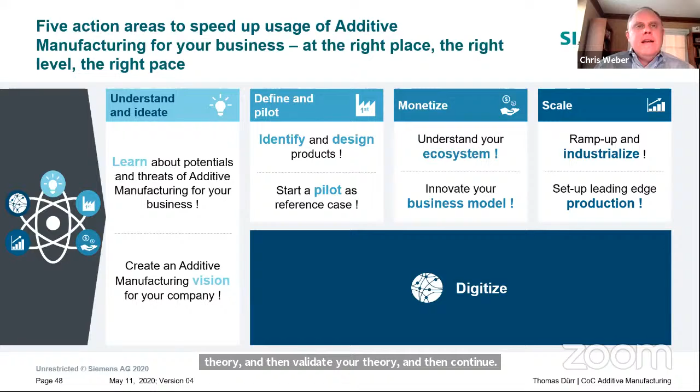So this is the time in order to do that. Make the investment, and make the investment in your people. And then, again, scale. Once you start getting the hang of whatever area, if you're making tooling, if you're making fixtures, if you're actually doing reverse engineering for parts, making spare parts, start small, get some small successes, and work your way up.

And then the last part of that is digitalization is critical. Embrace it, manage the process, manage the workflow, capture those learnings, so it's not lost, it's not just between somebody's ears and then they walk out the door. Digitalization, workflow management is really key in moving this forward for yourselves and for your company.

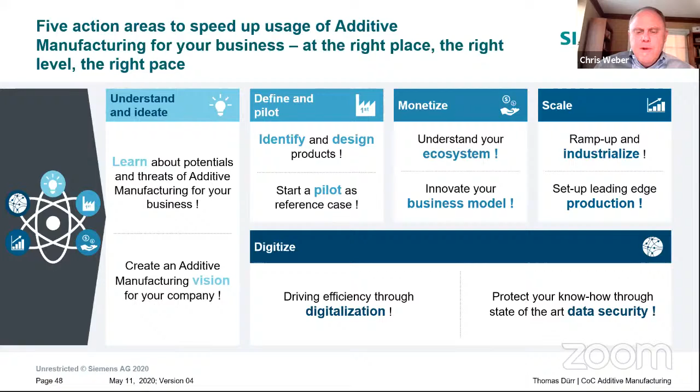Okay Chris, so the first question is, are the robotic solutions utilized in any private networks? I'm sorry, are the robotic solutions what? Utilizing any private networks? Well, it depends on how you're gonna connect these things. Are you gonna do a standalone work cell? Are you gonna do a serialized production type of thing? Are you gonna utilize edge computing?

The sky's the limit, basically. We offer all the above. So if you want to leverage edge computing in the cloud, we can enable that. And we have security factors in place and firewalls to protect your work cell on the shop floor. But the short answer to that would be yes.

Okay, great, thanks. Next question. Talking specifically about metal forming in the automotive industry, do you see additive manufacturing as a viable replacement for traditional stamping press subtractive production model in the next 5 to 10 years?

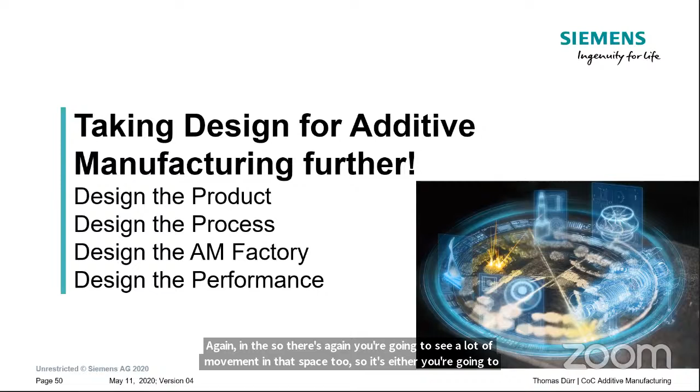So I'm going to just do our little wrap up here. That was the end of the questions for now.